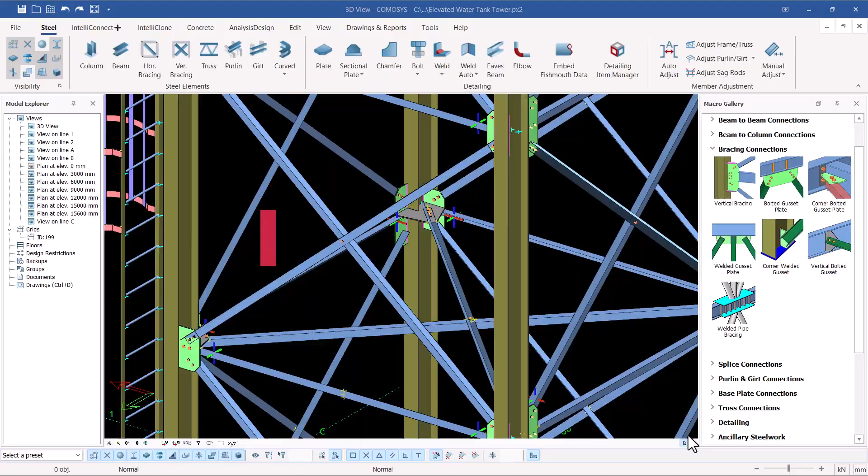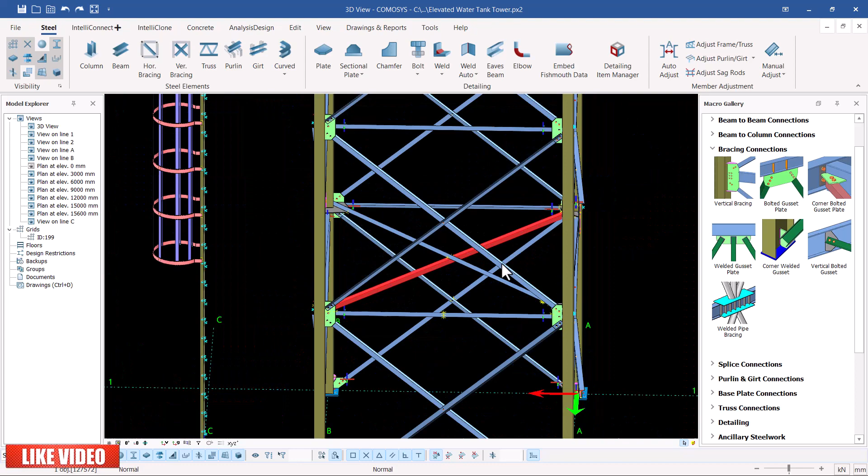Hello and welcome back. In this next step, I'm going to populate or copy the horizontal bracings upward, the way we did with the vertical bracings. The vertical bracings are these ones here, and the horizontal are these ones here. That brace frames diagonally from each column, like that, like that.

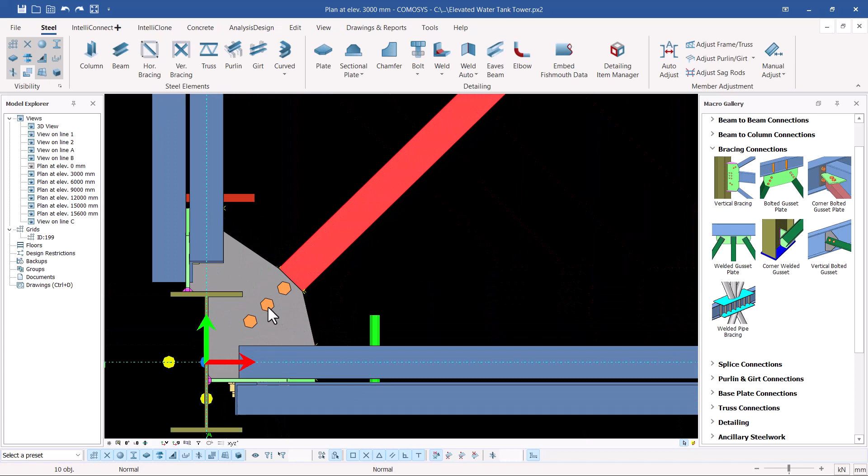Let me come to level 3 meters high. So this is the horizontal bracing I'm talking about. I'm going to select everything here and press Control, and select even the gusset plates here. Select on the gusset, select on the bolts right there, and select on the gusset plate. Everything, we want to copy everything. Select on the bolt so that we don't leave anything behind.

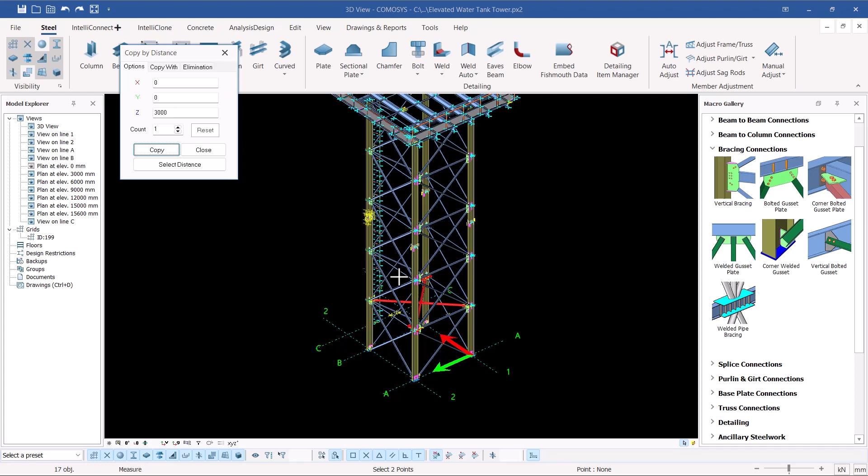Once I've selected that, I'll switch back to my 3D or isometric view. By default, we have our XYZ plane at global position. I'm going to right click and come to Special Copy here and pick on Linear. Under Linear, we want to populate this at an interval of 3 meters, and we have many counts. We need 3 counts here. Once I've picked 3 counts, I'll go ahead and click Copy. I'll give you some time to process that and close it.

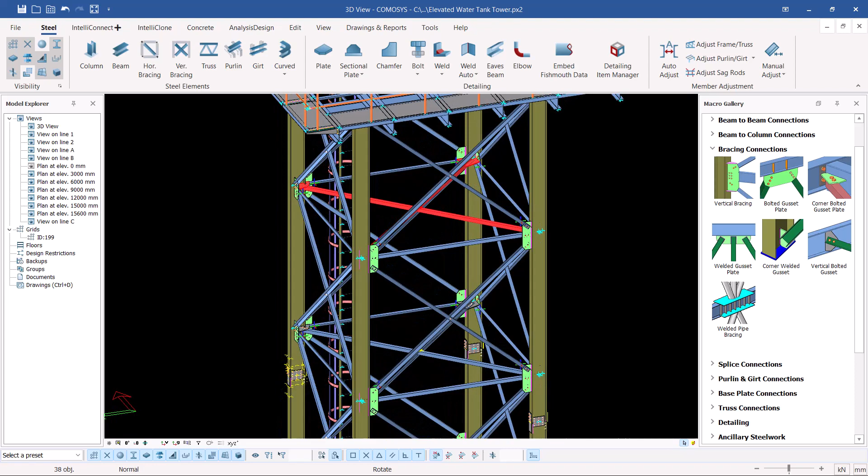Once that has been done, you can see at the top end here we have the bracing, or the far end one, already selected, meaning our copying ends there. If I zoom close, you'll be able to see I have my braces in place.

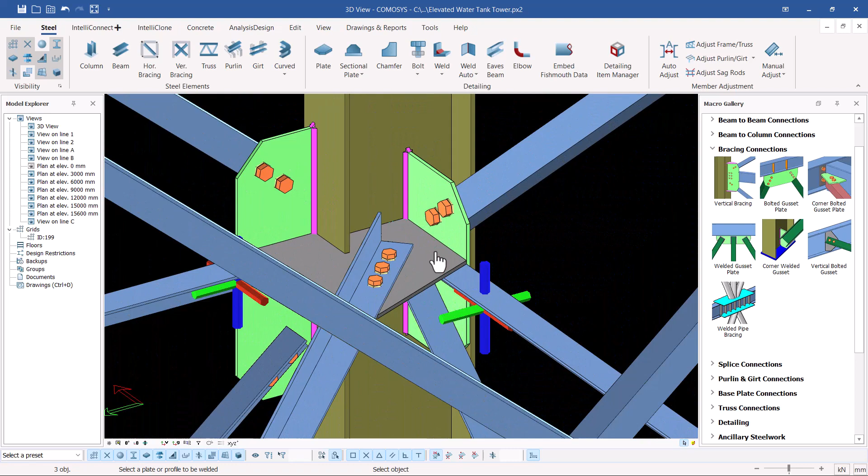From here we can now start welding, because this will not mess with our connection between these plates. So we can always go ahead and come to Weld, or come to Auto Weld, and start welding that to that, weld that to that. Just go all the way down here and weld that to that, weld that to that. At the bottom here, we want to weld that to that, and weld this to that. We can come here and weld that to that, weld that to that, and zoom out.

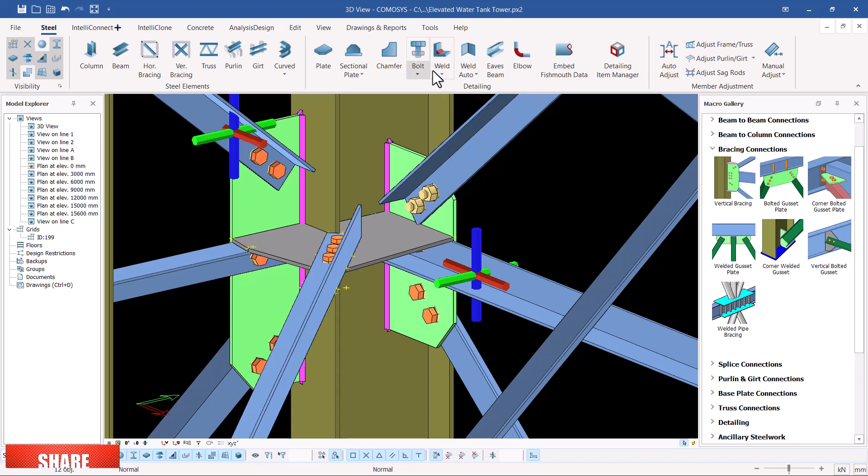We can always turn this, right click and terminate that command, and turn to the opposite direction, and do the same process of welding. I'll come to Auto and pick the two components, weld that to that, and I want to weld this to that one, and zoom up and target this end plate. I want to weld the three together, and if I come here, I'll be able to weld that to that, and weld that to that.

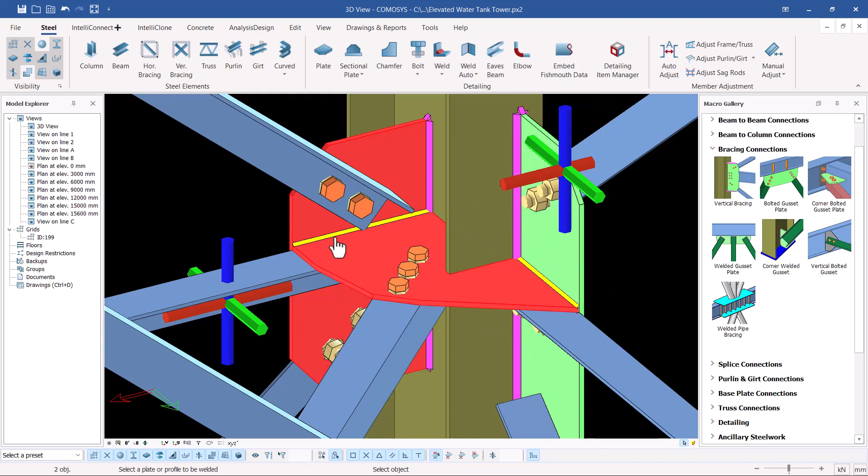Zoom up, and we want to create an assembly, and that. Right click to terminate that process, and turn to the other end, and we can create a weld between these 3 plates. We want to connect that to that. We terminate that. I'll come to Weld, and I want to weld this to that. Zoom out and zoom in, and that to that, that to that. Zoom out and zoom in.

We want to weld that to that, that to that. Zoom in, zoom out, we're almost there. And connect that to that, and that to that. Now the assembly has been created.

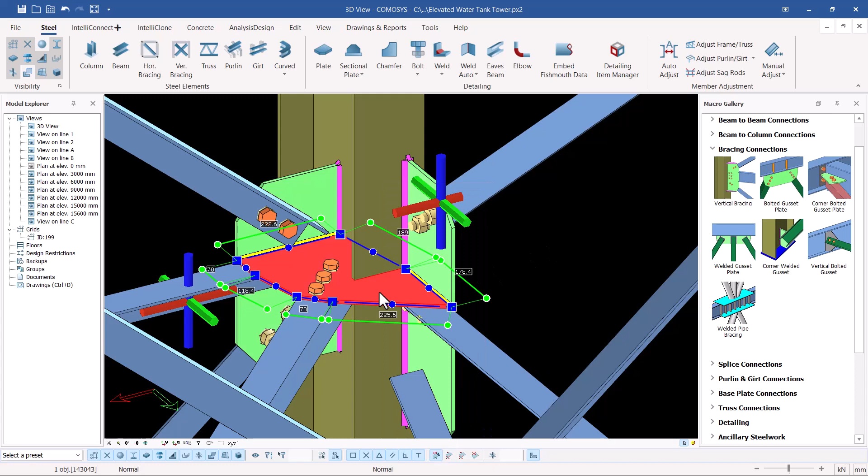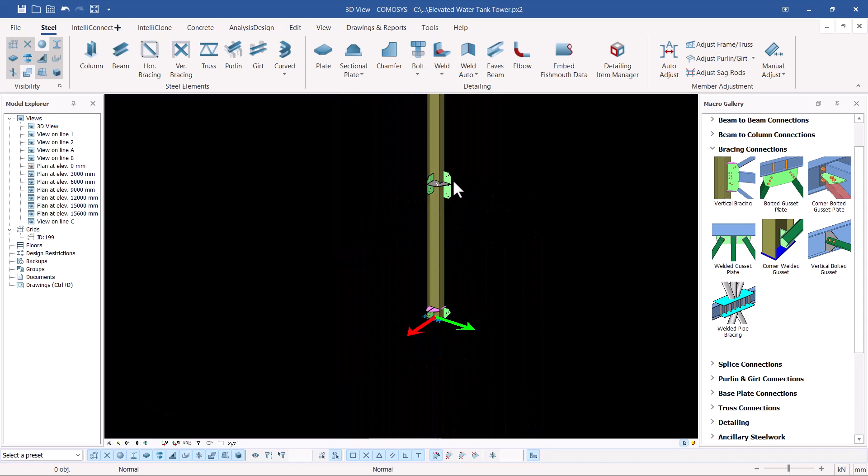If I right click, select on any of these members, right click and come to Assembly, and right click once again and pick Only Selected, you can see we have this as an assembly. This will be transported to site, and this is 8 meters, easy to carry, and this will be installed on the column base as it is, and the braces will run like that. So that's how you do it. Right click and come to Show All, and that's where we are.

Now the next step is we'll create the connection between this column here and these secondary beams. So let's meet then. We'll create the connection between this column and secondary beam, and we'll be able to brace this to the bottom end here.

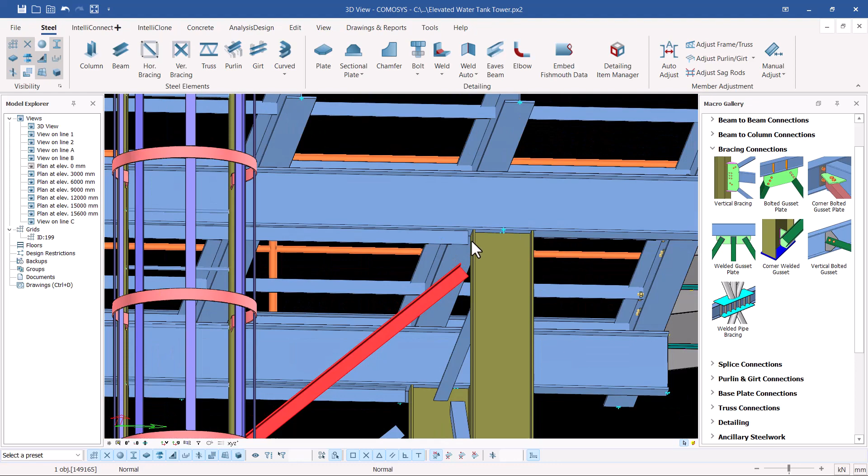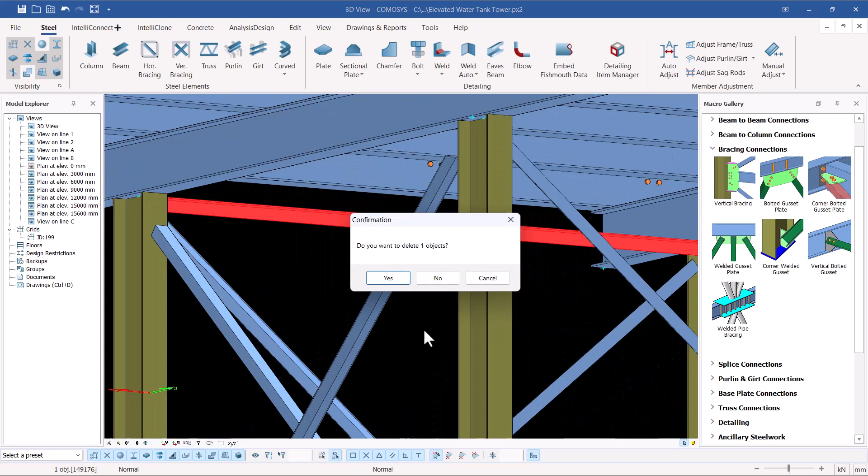I'm seeing a member that we don't need here. We'll delete that, select on that and delete. We don't need to add any member beneath these secondary beams here. We have to delete that. Select that and delete. And we have another one here. We can always delete that.

Perfect, so if I turn that, we are good to go. So let's meet then, and in the next step we'll be creating a connection between these two, as I've just shown you. So that's all about this step, and let's meet then.